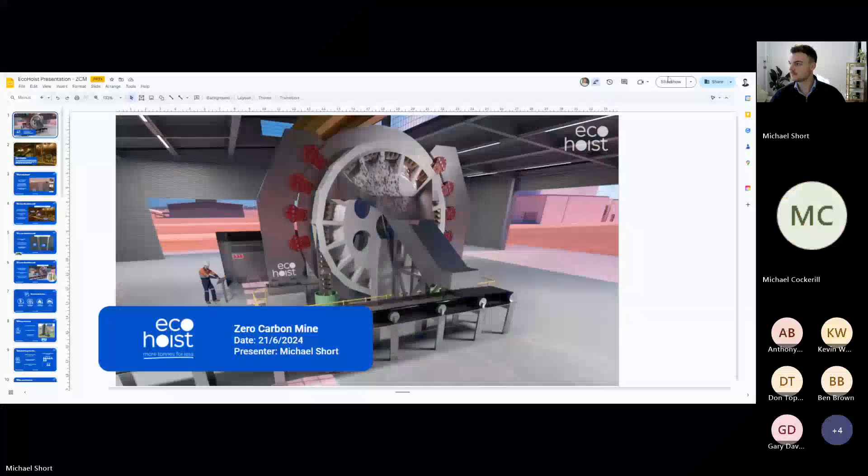You able to see the presentation slide? Yep, that's all good. Oh, fantastic.

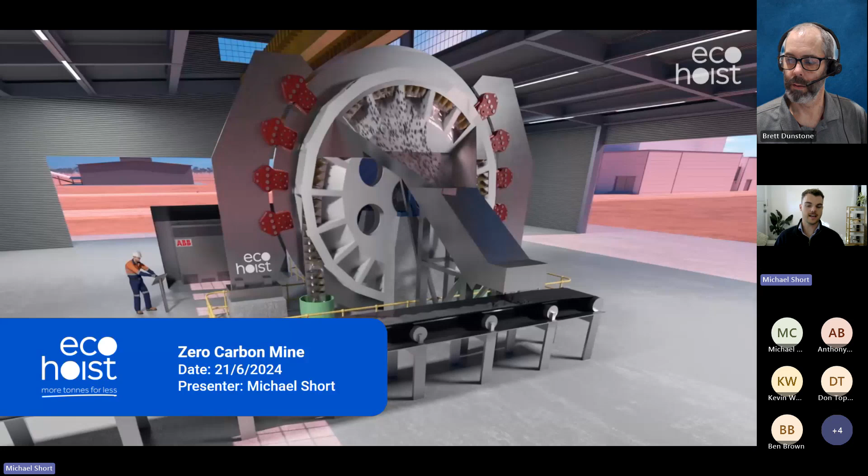Hi, I'm Michael from EcoHoist, and I'm the business development engineer. EcoHoist is a new solution, and our team is driven to help decarbonise underground mines. We do this by providing a commercially compelling alternative to replacing diesel haul trucks and helping decarbonise operations in that measure.

So I guess the first question is, what is EcoHoist? It's been considered a cross and a bit of a hybrid between traditional skip hoist systems and also vertical conveyors. We use a chain system that acts as a continuous vertical bucket elevator system.

The largest value proposition for EcoHoist is, rather than using one larger shaft, which is a very high capex exercise for projects, we use two smaller shafts for the system, which really reduces the overall capex and actually enables us to use a raise bore method for mining these shafts rather than your blind sink or traditional shaft driving excavations.

Sometimes we've been referred to as the low-cost skip hoist. Like I said, we're not actually a skip hoist system, we're more of a vertical bucket elevator, but we have been referred to as low-cost skip hoisting.

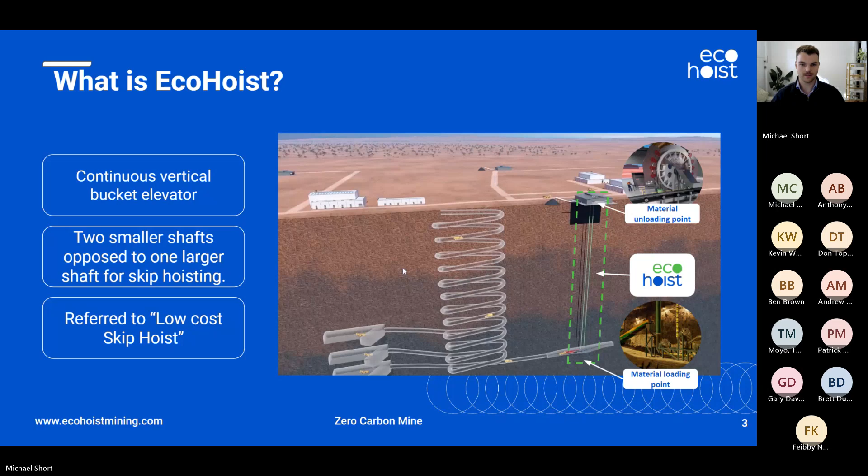So how the system works, I'll take you through the material path flow of the system. Initially, the material will need to be crushed, so we'll require preliminary crushing, which breaks the material down to a 40 millimeter maximum size. This is then loaded into our chute, which is designed to maximize ore flow whilst minimizing bucket wear as the buckets move up through the chute. Once it's loaded into the chute, it comes down into the buckets, and the buckets take it up to the surface.

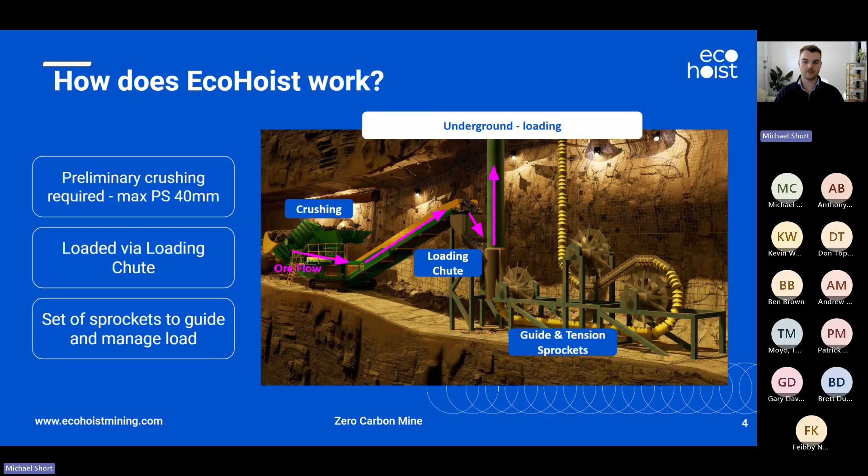In the underground features of EcoHoist, we use sprockets, which are used to guide the vertical bucket elevator, as well as put tension onto the system for when it's loaded and unloaded. There will be slack in the system, and that takes out vibrations and the slack in the system itself.

Passing up through the shafts, we have one side which will be hoisting material to the surface, whilst on the other shaft there'll be buckets coming down back to be loaded.

So we'll have two shafts which are a diameter between 1 to 1.5 meters, depending on the tonnage output that we require. A key point about these shafts is they have to be very vertical, in the sense that these are fully suspended loads, so they're nice and straight, which we can achieve with Micon's directional drilling system that they have in place.

In terms of how much material is suspended in that shaft, it's actually less than a skip hoist system, which can be 80 to 100 tons. These systems have suspended in the cable, the skip itself, as well as the material. We use a lightweight material that has high strength in the chain-like structure, and because we have less material suspended throughout the entire shaft, we only have a suspended load of 30 to 50 tons.

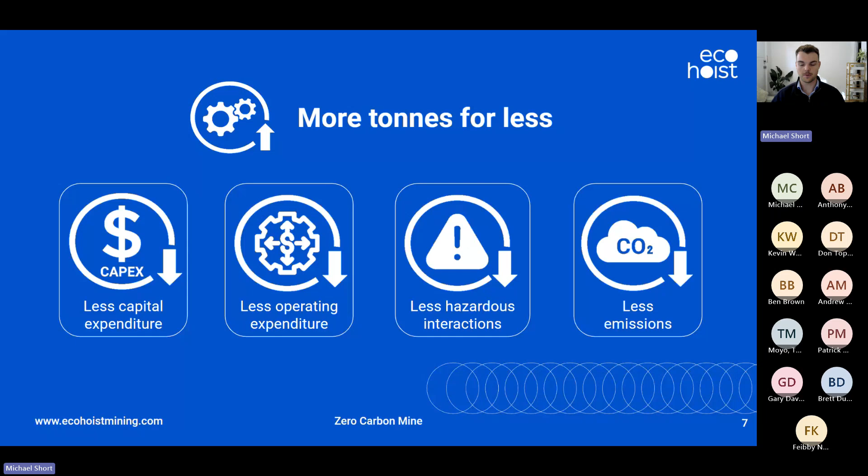So with EcoHoist, we drive the value proposition of having more tonnes for less. Let me explain the benefits EcoHoist brings in terms of cost savings, emissions savings, and how it makes operations safer.

As I touched on before, we actually reduce the shaft diameter compared to traditional skip hoisting, up to 6 times smaller, which is a massive cost savings.

The head frame itself is actually 5 times smaller. We don't require that large pull that skip hoist systems need because of our sprocket design. It's a much shorter system.

We also have further cost savings in the electrical components compared to a skip hoist. Skip hoist systems require really high accelerations and high velocities to get that quick cycle time, whereas we're just a slow, continuous moving system, so we can have much smaller components. For example, a 1 megaton operation might have a 3 to 5 megawatt drive system, where we're looking at more of a 400 to 500 kilowatt system.

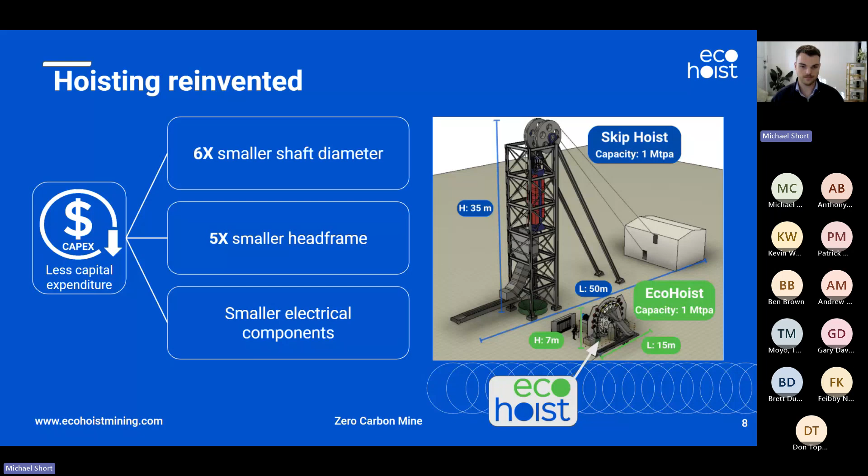We'll see further cost savings in production compared to haulage trucks, with far less distance required from trucking to surface. This optimizes the production cycle and allows us to reduce the number of trucks underground, which has the flow-on effect of reducing the number of required operators.

The ventilation required will also see a dramatic reduction. Keep in mind the ventilation system is actually a cubic relationship, so if we have 10 trucks compared to 2, rather than a linear relationship it's more of a cubic relationship. So we'll see massive cost savings by reducing the trucks.

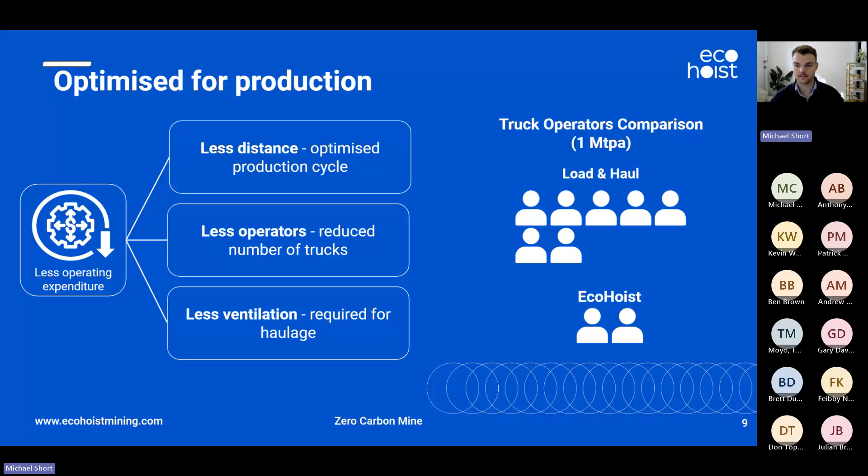Removing the fleet from the underground operation will also create a safer environment, with fewer interactions between the diesel fleet and other equipment, less personnel underground, and also benefits in terms of the shaft itself.

Skip hoist systems require personnel to inspect these shafts weekly or fortnightly. Because of the size of our shaft, we physically cannot put personnel down the hole. However, due to its confined nature, we can get far better readings of the shaft's integrity remotely using cameras and sensors.

Any questions come through so far? Not as yet. Oh, keep going.

And then in terms of EcoHoist removing the diesel fleet comparison, we will see far less emissions created in the operation, with savings from less diesel use but also less ventilation required.

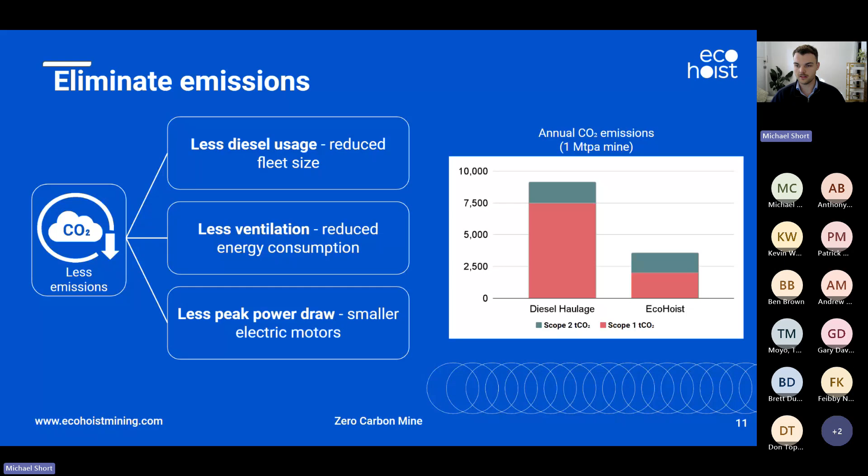We just have a question from Don, asking us to go back to the buckets and describe them in a bit more detail, particularly the size. Yeah, definitely can. So we'll go back to the buckets.

To give an overview of the buckets, the system consists of a chain that uses modern day composites such as fiberglass to achieve a really strong, lightweight material, which is shielded with a plate, and the buckets are attached to the plate.

In terms of pitch, the distance between each link ranges from 1 to 1.5 meters, probably more around 1.2. In terms of diameter, we're looking at 60 to 80 centimeters, for a round bucket that's 60 to 80 centimeters wide.

So we see EcoHoist being used for a range of applications - mines that are interested in increasing their production rate, that are deeper than 250 meters, looking for cost-saving opportunities and opportunities to reduce their carbon dioxide emissions and diesel consumption, and really accelerate the electrification of their operation.

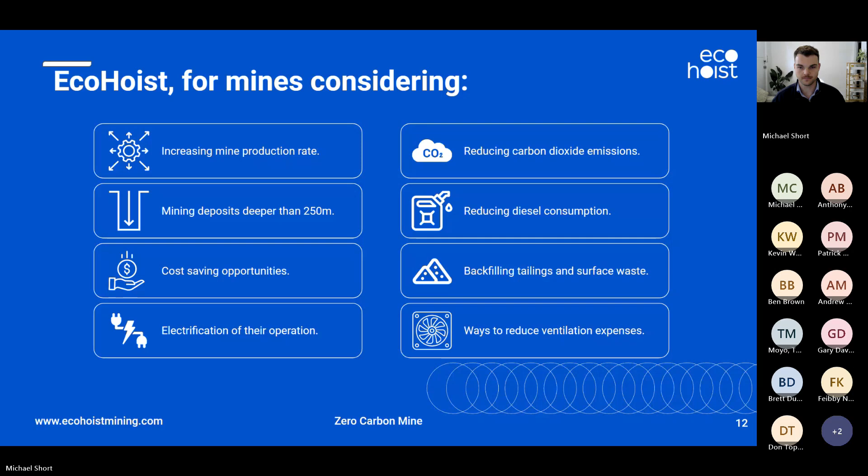That question was around cases where it's been implemented, and I take it that's still a work in progress, but yeah, we're an early stage technology. I'll touch a bit on it in the later stages of this slide pack, the progression plan to implement that first product of a full scale demonstration. In terms of duration, we're aiming to have one of these installed by 2028, really pushing on that 2030 goal for mining operations to have a commercialized solution to deploy before then.

In terms of a commercial comparison, we've made a quick cost comparison between haulage trucks and skip hoist systems. Because of that much lower shaft capex, we greatly reduce the overall capex of the operation, and the low opex of the system compared to haulage trucks means we actually see an overall lifetime cost savings in material transport to surface. So taking the benefit of haulage trucks with low capex, but also taking the benefit of skip hoists with low opex, and combining those.

To give a sense of where it sits in comparison to other technologies, we see EcoHoist ranging from 500,000 tonnes to 2 million tonnes per annum and down to depths of 1,500 metres. EcoHoist plans to be a modular type system, so for operations looking to have production rates greater than 2 million tonnes per annum, which there will be a lot of, we see it being a commercially compelling option to have multiple EcoHoist systems throughout the mine, which then unlocks the opportunity to have more dynamic mine design plans, but still have the benefit of skip hoist systems.

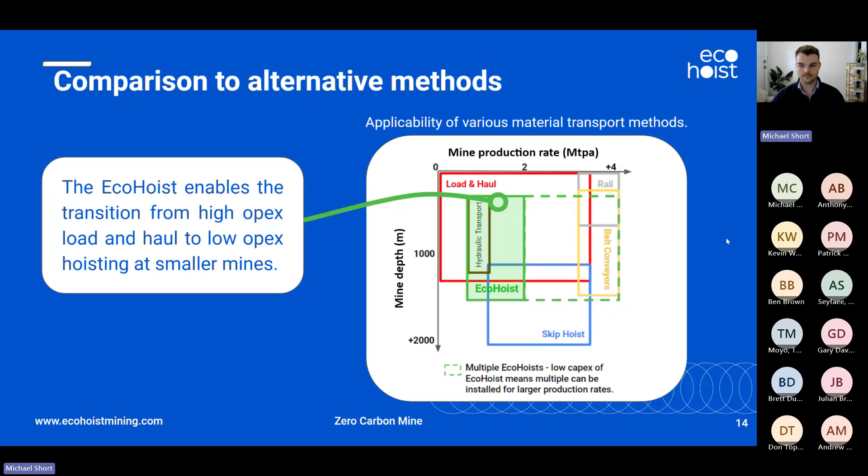In terms of installation of the system, like I said, we can use raised bore systems, which will be a big benefit in deploying many of these systems - a much faster method to build a shaft rather than blind sinking. Then utilising Micon's RVDS product to get the straightness. We've also included liners in our cost systems for an EcoHoist system, and depending on geotechnical stability, either steel shotcrete or a hard polymer plastic. Then in terms of underground, it's pretty generic drill and blast underground.

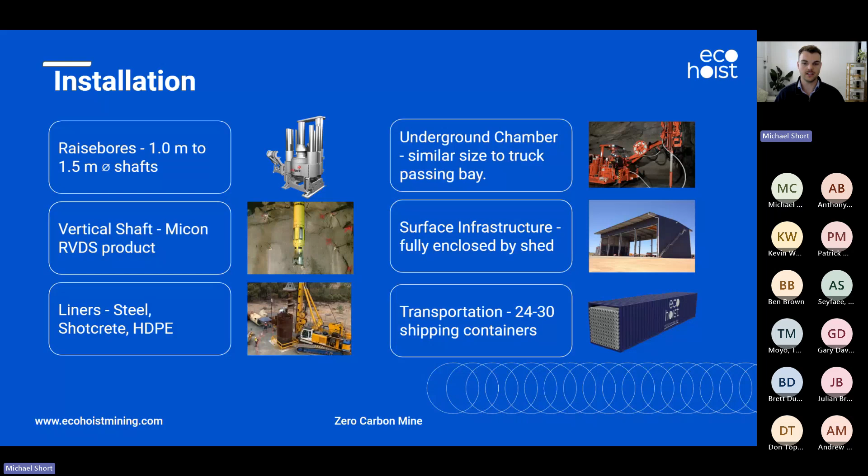In terms of the footprint on surface, think of a medium to large warehouse or dairy shed that's used on the mine site to fully encapsulate the EcoHoist system - a little bit bigger than a skip hoist motor room, but not bigger than the hoist head frame itself. And then in terms of transportation, we see EcoHoist, because of its small size, being able to be shipped out in shipping containers and installed on site.

To touch on maintenance, there will be a range of parts, but compared to a truck, for instance, there will be far less variety of parts in the system itself. Really, we're looking at lots of parts, but only a few varieties. So buckets, chain, shield plates, and pins, and then a sprocket at the surface and a sprocket at the bottom are the real key components.

There will be wear throughout the buckets, which is a common question - how we manage the wear. We see the buckets being interchangeable, so pretty easy to clip off and clip back on again with a new part, and we manage that through our loading mechanism at the bottom for the wear rates. Pins and rollers will also wear throughout. But we're looking to build a 30% demonstration unit, kind of like a car park test bed, which will give us much better insight into those.

In terms of the drive system and power components, we are partnered with ABB. The actual design of the EcoHoist system itself, from a drive and power components aspect, is exactly the same as a skip hoist system - we just remove the barrel and put on the sprocket. So in terms of calculating the power components, we're very similar to a friction hoist system because we have the balanced weight on each side.

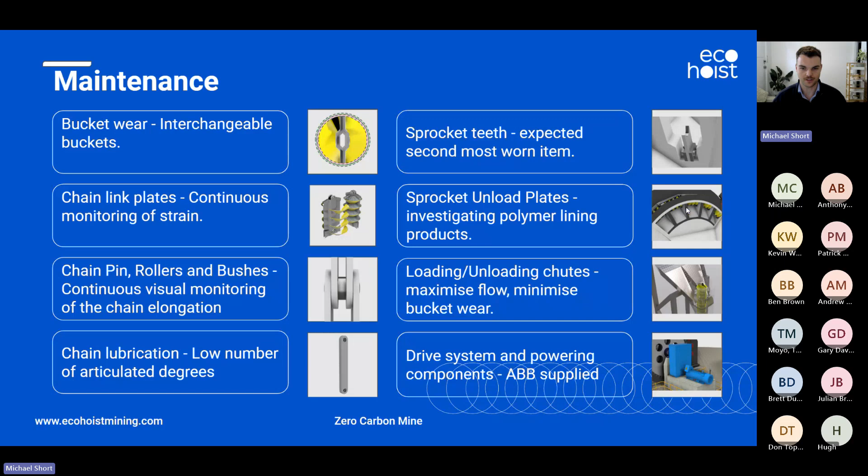In terms of Gary's question about backfilling and paste and dry stack tailings - that's an interesting concept that I didn't actually put in this slide deck, but it is something we have looked into. So with these bucket designs, what Gary's asked about, we have looked into a backfilling option. I figured this is the first introductory slide, so there's only so much information we can tell, however the question came up on opportunities to use this as a backfilling system.

So we have designed an EcoHoist system which flips the bucket, in a sense, so it will have buckets which can hoist material up, and then once it goes over to the other side, it can also take material down to the surface - or underground. This unlocks a lot of opportunity for using dry backfilling, dry stack tails, legacy waste that's on surface, as well as other material that wants to be taken underground. It actually creates a balanced system. So thanks for that question.

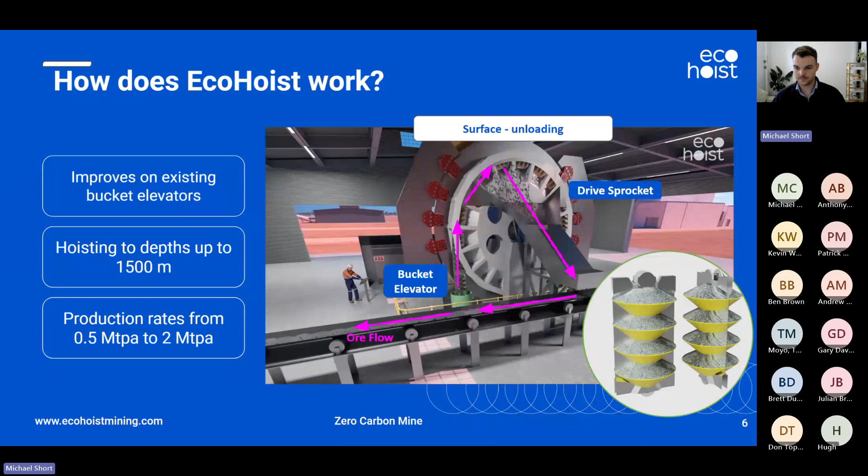This touches on some of the more common questions, like what are the big risks. This is a new tech, so we know there's going to be some big challenges with it, but there's also going to be some great rewards. These are some of the key questions, and one of the big ones is what happens if it splits?

We've looked at the failure load - what happens if it fails due to structural overload or cyclic fatigue, or the system completely snaps in the middle, and how does it react? We've done early stage designs and computational modeling, and from the physical demonstration it actually kind of jams itself.

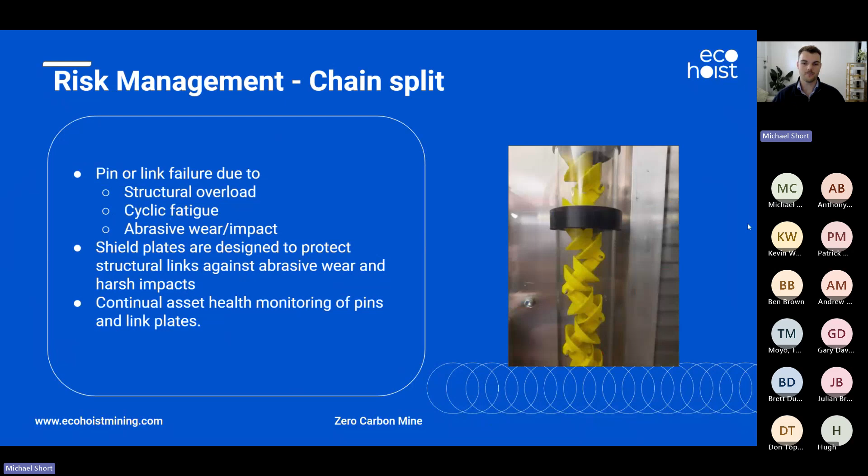We did a small jagged test, a small split test where we did 50 trials of snapping it in different places to get an early stage understanding. That actually kind of jammed its whole set, jamming the entire chain link itself, which meant the recovery process used more of a grapple-type effect, or lowering it down controllably with grippers. This is something we want to develop further in our test bed and warehouse demonstration, but it's definitely a risk we're looking at pretty seriously.

Rock spillage - like all shafts, this isn't a fully enclosed system. How do we control the spillage and loading, and also mid-shaft spillage? We've done fully computational modeling with a partner, loading the actual mechanism and looking at different variations to minimize spillage. There will be an apron feed underneath to relay the material, but we're still looking at 90% of the material actually going into the loaded bucket.

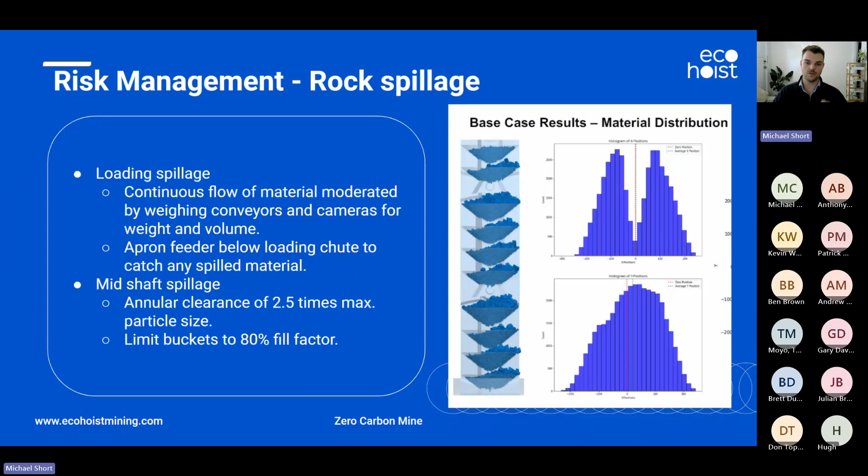In terms of mid-shaft spillage, if material were to fall off the bucket in the middle of the shaft, we've looked at design constraints similar to industry standard - clearances between gaps of 2.5 times the max particle size - and also limiting buckets to an 80% fill factor, using cameras and scanners to make sure we're measuring that load correctly.

Jamming is another big question we often get - what happens if the system jams in the middle of the shaft? Jamming is likely to occur before a snap, so we'll have sensors throughout the entire system to pick up the jam before it snaps.

The causation for that is jamming from the material itself due to overloading. We can manage that by underloading the system, reducing the chances of that occurring by managing the load rate of the material.

The other question is what happens if something enters the system which shouldn't, such as a tramp - think an iron bolt or similar. Similar to conveyor belts and shaft systems, we'd have a detramping mechanism at the start with a large magnet to remove all that material.

If it does go into the system, the design is to currently have a more confined shaft for it to pass through before entering the main shaft. That confined shaft will have really accessible areas so that if any jam occurs, it will occur in that spot and we can clear it.

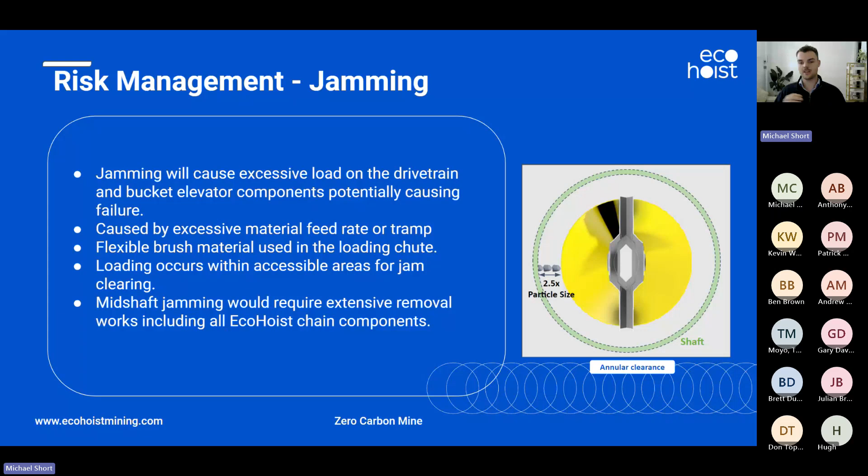The other question is geotechnical stability. Big shafts in skip hoists are well known for self-caving during development or even during their operational life. They're also known to require a fair bit of structural integrity around the sides to actually hold those shafts together and make them geotechnically stable.

Our cost modelling has included all the way through to completely steel lining the system, though that would be limited by suspended weight. We're still not even touching the loads required in skip hoist shaft lining. We've looked at steel, shotcrete, or plastics to line the entire shaft, which creates a far more geotechnically stable system compared to a large 6 to 7 meter wide shaft.

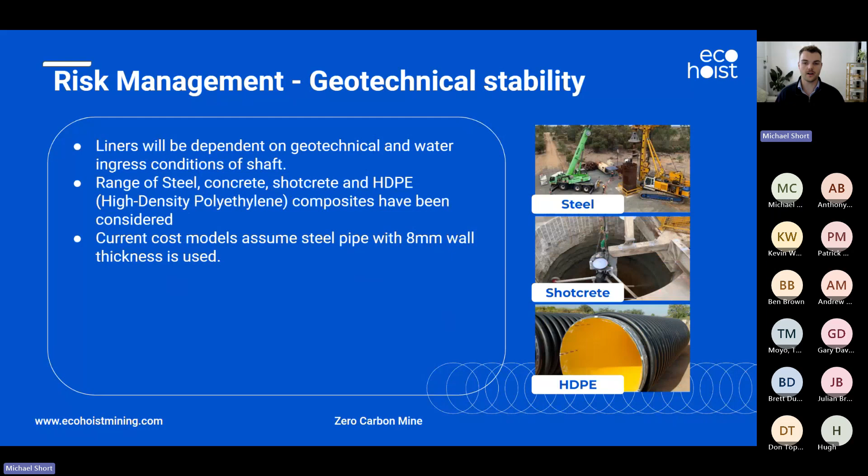In terms of research and development, we've been through a series of detailed designs of the system. We've completed a lot of accelerated testing on the links themselves - this is tensile testing of how far we go until it splits. We're getting some pretty incredible results, as well as from the cyclic loading.

We exposed it to the different strains it would experience as the system goes around the whole loop, meaning the chain link itself will actually stretch and compress throughout the entire cycle. We managed to get 20 years of cyclic loading on these systems, on these links, before we actually ran out of time.

So we still got to go back and do further testing, but it was pretty promising and gave us really good data on what these chain link systems can actually achieve. We've made small scale tests that simulated the loading and unloading of material. We've built one-to-one demos, which some people may have seen before at conferences. And we've also looked into wear testing and done some computational modeling, which is becoming quite interesting for designs.

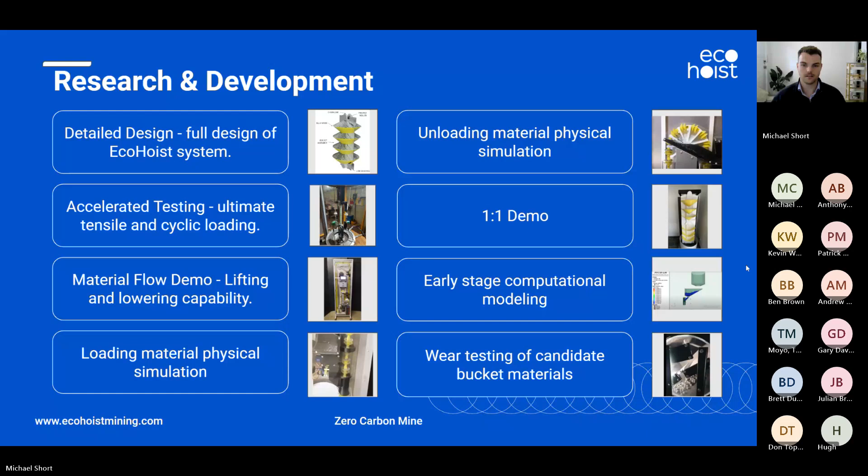So this is the 30% demonstration unit, or the warehouse demonstration unit that I've been referring to. This is the next step for EcoHoist, and it creates a research and development test bed that we can work with our OEMs who will be supplying these components. We can work with mining operations to answer questions like what will be the downtime, what will be the availability, can we achieve the availabilities we require, and if it links, how long will it take to recover. This really gives us good insight before we go to the next step.

And this will also give us better understanding to help, because this is new tech, give the regulators understanding of how this new technology works, and make sure we're ensuring a safe and reliable system to be deployed into sites.

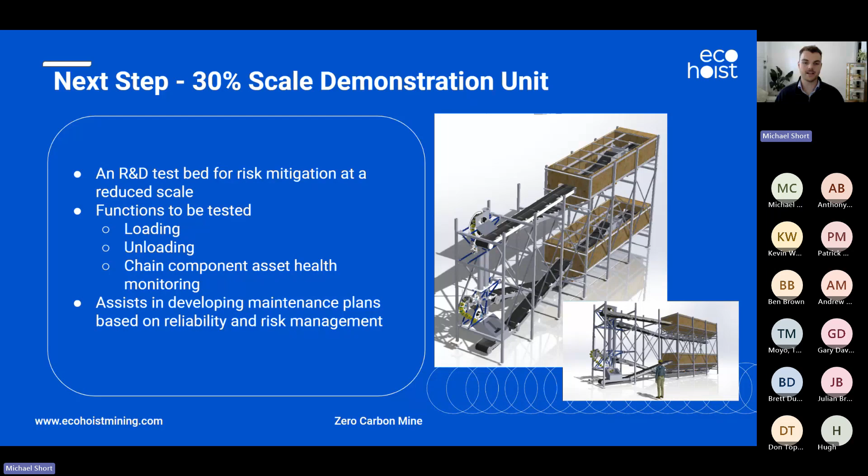So it's worth mentioning that this 30% scale demonstration is being done in a joint partnership with ABB. The system is designed to be fully ABB spec'd to their safety standards and uses ABB's risk management procedures.

So we recently completed a case study. This was a generic mine that we looked at with a 500 meter deep production rate, like an ideal first customer at a production rate of 1 million tons. We compared what it looks like with their diesel haulage option compared to if they installed an EcoHoist system.

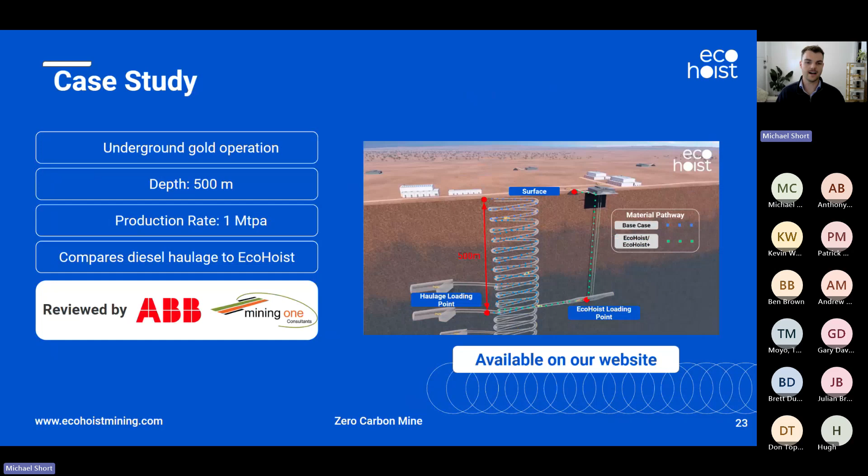So we looked at this case study, and it was reviewed by ABB and Mining One. You can go to our website, fill in a section there - I've put the link at the top - and this will allow us to send you through the case studies for your review as well.

So we actually saw EcoHoist provide an increase in the NPV. We saw a reduced total diesel truck count - the number of diesel trucks was reduced. The overall carbon released by the operation was reduced by over 100 kilotons. We saw a 250 kiloton increase in production as well. We assessed that case and also saw an investment IRR of over 200%.

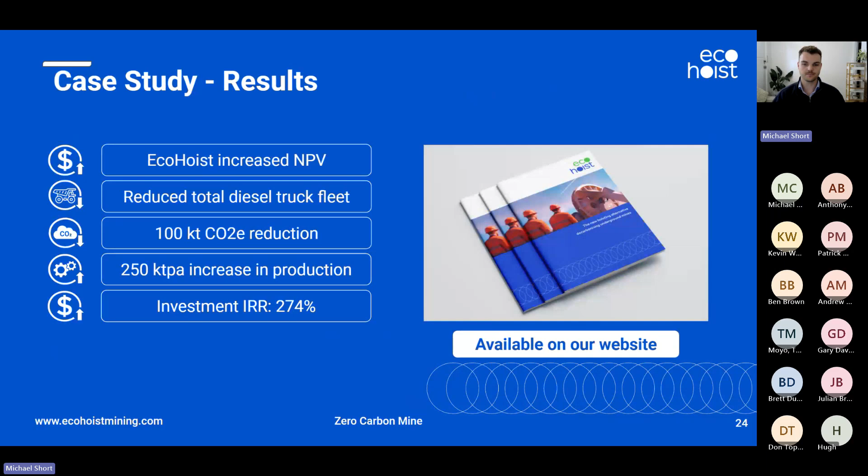With those learnings from the case study, we applied it to an early stage integration desktop study. This looked at an ASX-listed mine company looking at their brownfield operation. They were currently under a scenario where they were ventilation constrained, and they'd have to sink an entire new shaft if they wanted to achieve the production rates they wanted.

So in comparison, we looked at what it would look like if we were to install an EcoHoist system, and we actually saw a reduction in the overall lifetime cost of 18 million. We saw them reduce their truck fleet by 4, as a result of reducing the overall TKMs required by 6 million tonnes. We saw nearly 30,000 tonnes of CO2 reduced, and we also looked at the potential opportunity to increase their production rate, since they're no longer constrained by their ventilation requirement in their haulage fleet. We could actually increase their production, resulting in increased revenues.

The next steps for us are the 30% demonstration, which we're looking to complete by 2024, the end of this year. Then we're looking to deploy that first customer full scale at 0.5 to 1 MTPA, around 100 to 200 tons per hour, starting in 2026, aiming to have that fully commercialized product ready for 2027, and then deploying those commercialized projects in 2028, like I said before.

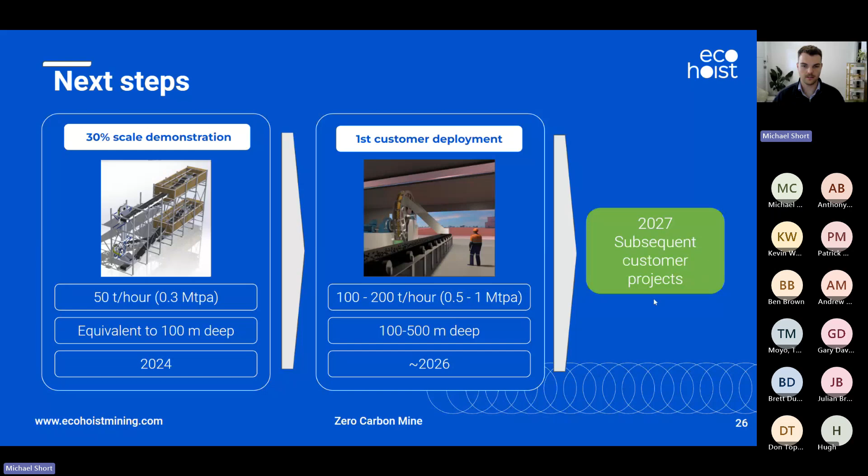So yeah, thanks for listening, and that's just a little bit about EcoHoist.

All right, do we have any more questions out there? I think seeing what just came up - got a few. Have one around the rough capital cost on a first customer deployment. Which one was it, where's that? In the Q&A. Oh, Q&A, just can't find it.

Oh, the rough capital cost for the first customer. So we didn't touch on capital cost as such, but for these systems we'd be looking at 20 million for a first customer at 1 million tonnes per annum. For the integration study we completed, on a mine site at 1.3 million tonnes per annum at about 600-700 meters deep, the cost for that project overall was 40 to 50 million. That includes the full shaft installation and crushing underground. These numbers came directly from OEMs and/or shaft installers.